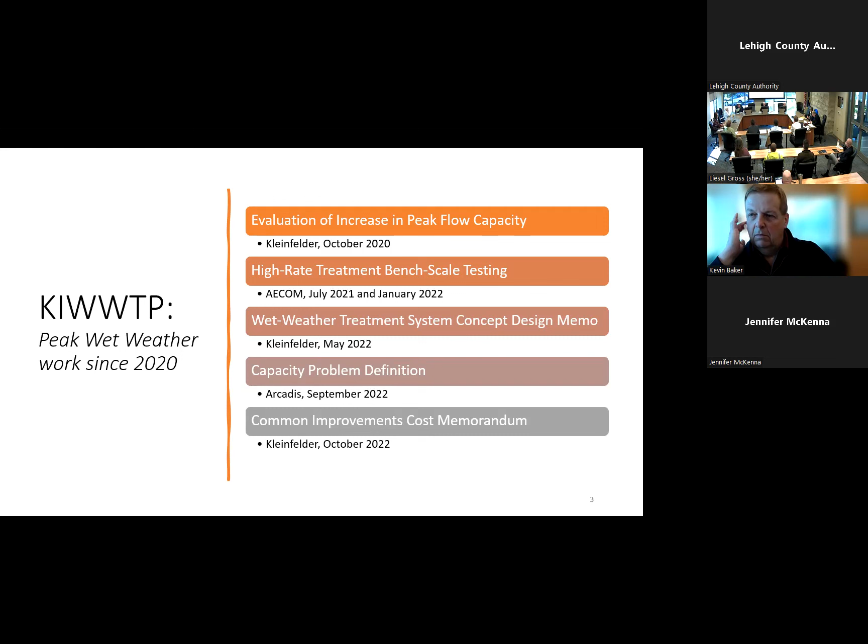003 is used when the plant experiences more than 87 million gallons a day. It doesn't happen a lot, but it happens more than zero times - like Lisa pointed out, that's a good way to say it, it happens more than zero.

So we have to reduce the number of times 003 is used. The tricky part is that the conveyance system is also limited to what can actually get to Kline's Island. We're saying 105 is the number that can actually get there, and everything else backs up upstream. So there's two different numbers in play here, but the biggest number we're going to talk about today is that 87 number and what to do about it.

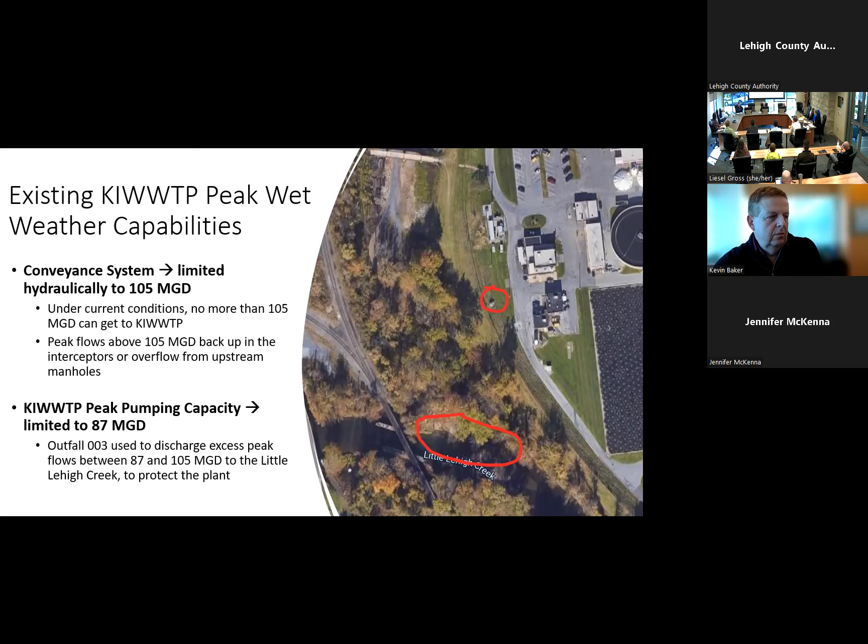Again, DEP does not like 003, and we have to raise the capability of the plant to handle more peak flow.

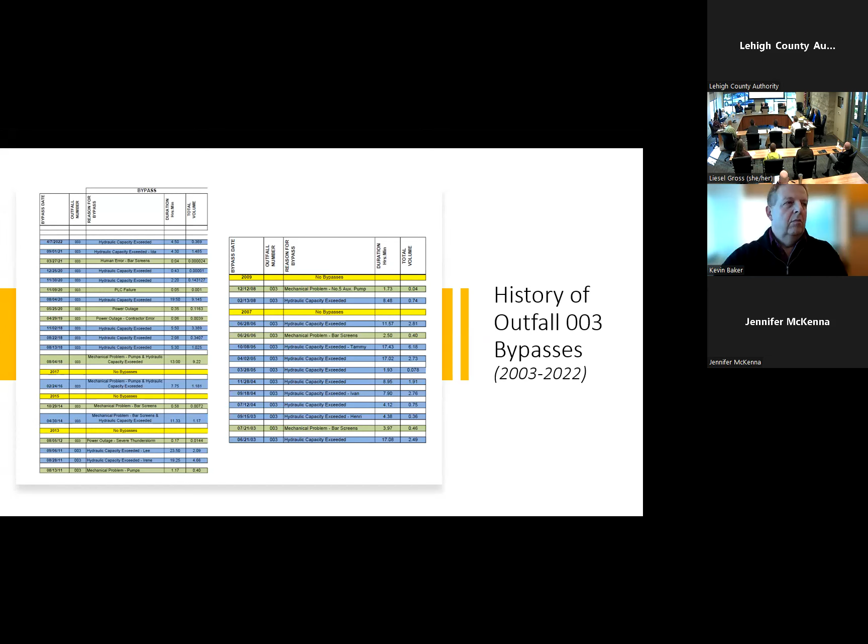So we want to split this up into two phases. The first phase, we want to go from 87 to 100. And then the second phase, we want to go from 100 to 120. I'll talk about the timing and what both those look like shortly. And again, phase 3 is the authorization that we're going to be talking about in a couple minutes.

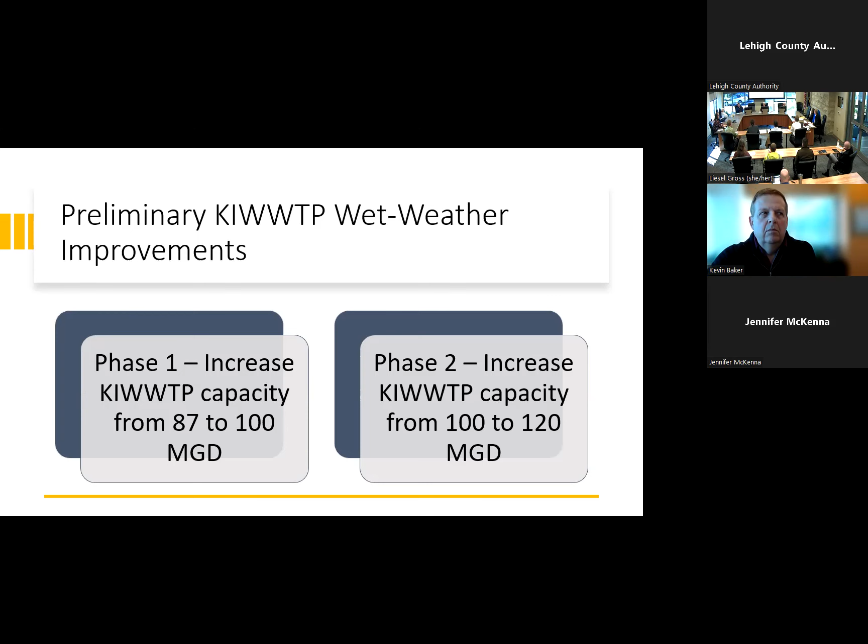Phase 1 is a lot of this is actually master plan driven. So the master plan identified there's two main pump stations at the plant. Both these pump stations need quite a bit of work electrically and from a pumping standpoint. So once we make changes to both of those pump stations, we're going to increase the pumping capacity to 100 at both stations.

And then, of course, there's a lot of electrical involved with that. The third piece to get to 100 - there's some interconnect piping that needs to occur to split the flow. So in a nutshell, it's all increasing the pumping, electrical work, and some yard piping work. And that's phase 1.

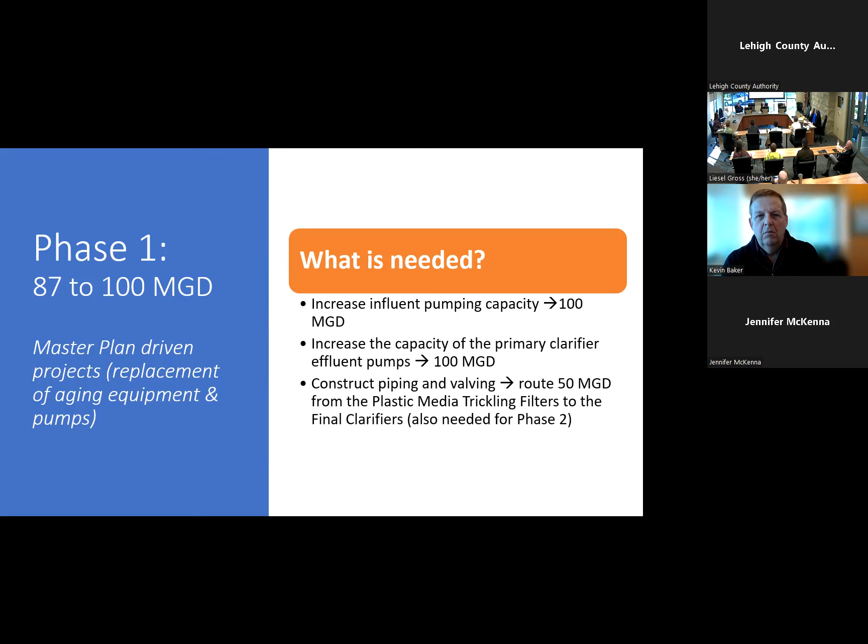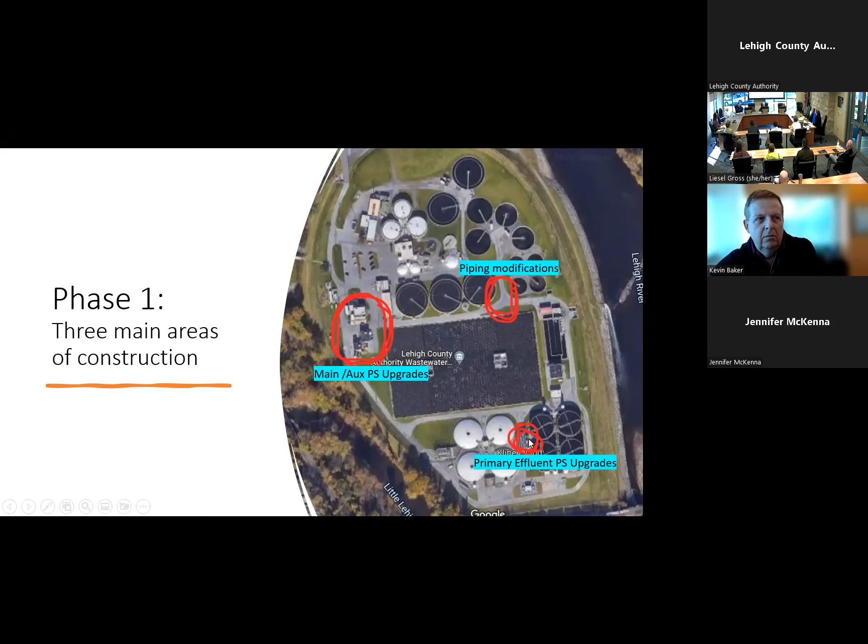This is just a graphical showing where the main areas of the work is going to be occurring. The left circle is the main pump station, auxiliary pump station - that needs upgraded. The bottom circle is the primary effluent pump station that needs upgraded to 100. And then the piping is going to occur in that third circle.

Phase 1 did not talk about anything outside of the plant. Phase 2, we're going to start talking about items outside the plant as well, and again we'll have 100 in place. In order to get to phase 2, remember the conveyance system is restricted, too small. So once we start opening up the conveyance system, that means Kline's Island has got to start handling more peak flow. That's what's going to happen with phase 2.

The Park Pump Station, the LCA Park Pump Station, that force main stops about 1,000 feet short of the plant. So we want to extend that force main to the plant, and then there's additional work on top of that extension to get to 120 - that'll be on the next slide. What's important to know is that this extension has been talked about for decades. It's never come to materialize, but now it's starting to become a solid plan with this phase 2.

We'll talk about the timing soon. What's important to note is that in order to get to 120, we have to do some changing to the way the flow trickles down through the plant. Right now it's always in series, so we have to do some parallel operation to split the flow inside the plant. We'll talk about that soon.

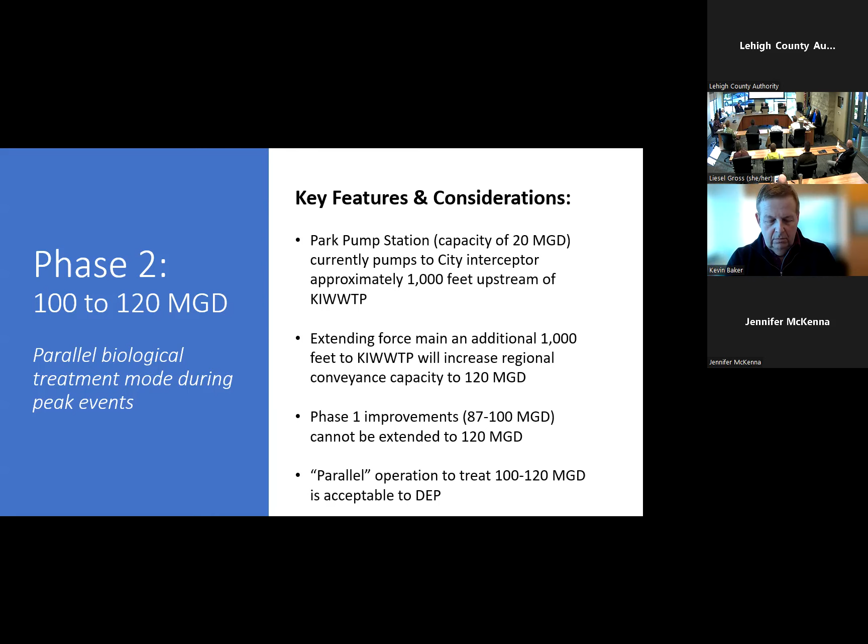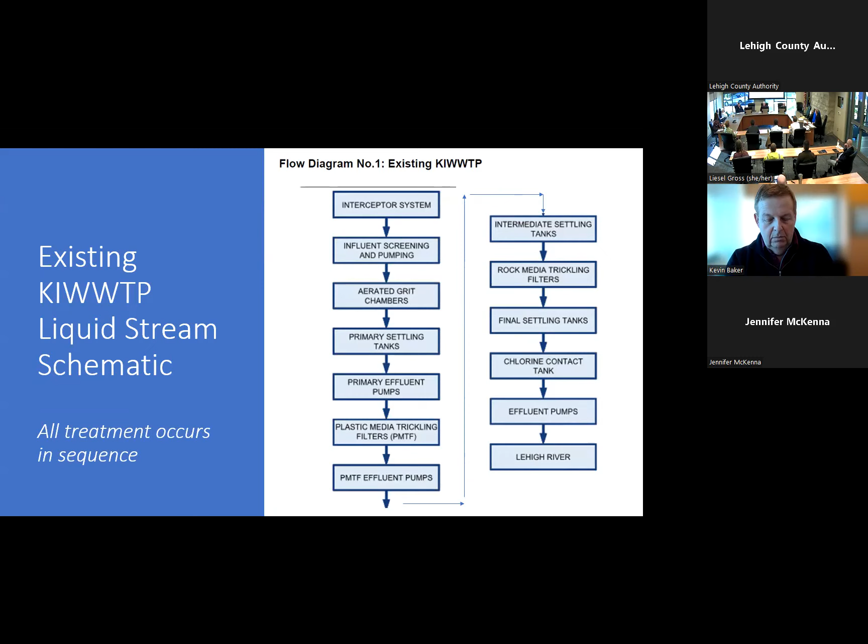So in 120, 20 will be treated by the rocks - this is a very high level view. 20 will be treated by the rocks, 100 will be treated by the 4 trickling filters that we have. Then after that, the flow gets split to the different settling tanks, so that's why we say parallel mode. Only some of the flow is going to be treated by the rocks; the other flow will be treated by the towers.

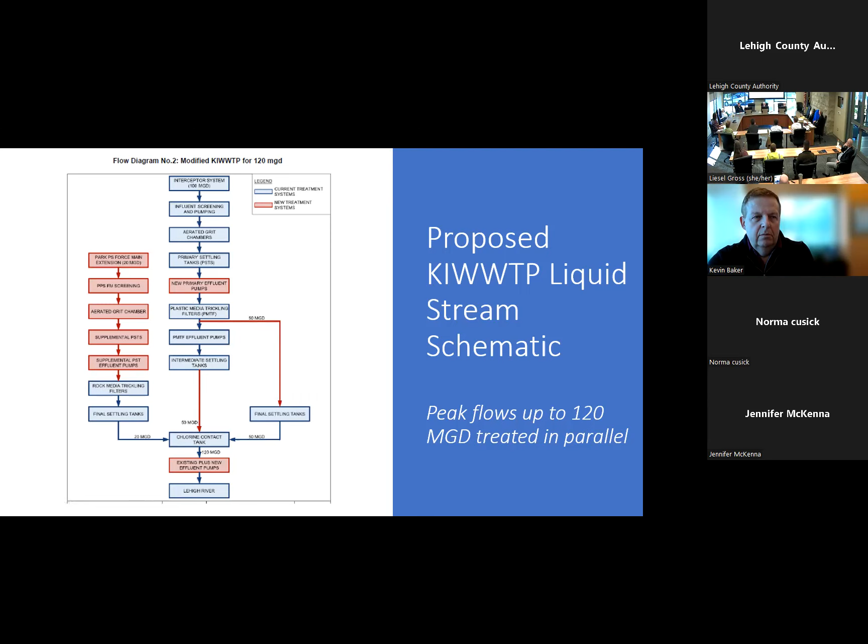So again, this is what I just mentioned already: the extension, new grit chamber, new screen, 2 new primary tanks, and then some valving and piping. And then we have to increase the effluent pumping system to 120 as well.

Again, we'll talk about this shortly, but we've talked to DEP about this 3 times already. We've talked to DRBC about this 1 time, and no major concerns from both parties about getting to 120, which is a good sign.

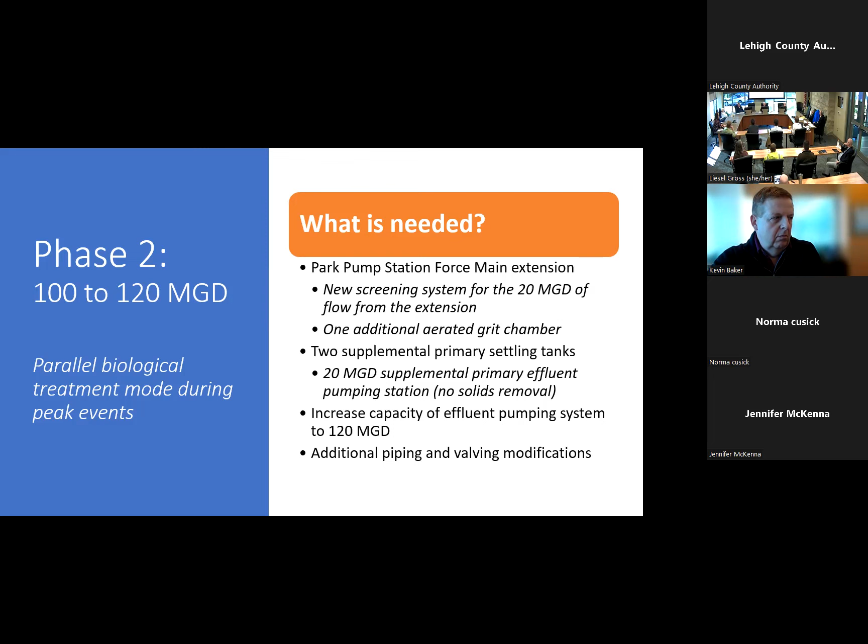Bill, you don't see any risk preventing us for phase 1 and 2 to get us to 120? I mean, this is a theoretical model, right - it's a modeling that we have done. So if you go through key things that have to happen to allow us to get to 120, what are one or two things that keep you up at night that might prevent us from getting to that 120?

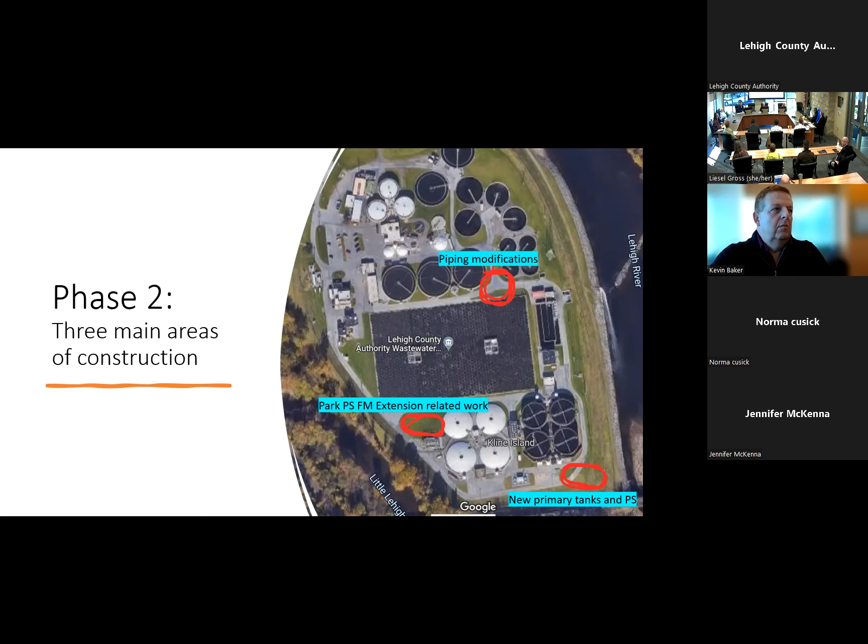So I mentioned that we met with DEP 3 times already. We actually just had a phone call with them about an hour ago, and they are still comfortable with this approach to get to 100. And the one going from 100 to 120 may have to go into the final 537 plan.

So we're talking about the timing soon here. But again, we met them in June, August, November. They're well aware of what we want to do here. No major concerns by DEP.

DRBC, same thing. We have to always make sure we avoid the substantial alteration piece when we talk about Kline's Island. No major concerns by DRBC. They will want a new docket.

So we'll have to take care of the paperwork. And Chuck, I believe you've already started to receive some preliminary design documents from the client for phase one.

Yeah, in a couple months I'll be taking to the board a request for design phase approval for 3, 100 MGD projects. What Phil had said, one of them is the main and auxiliary pump station upgrade. The second one is the intermediate pump station upgrade, what Phil mentioned about the primary effluent pumps that pump the effluent from the primary clarifiers to the top of the plastic media trickling filters.

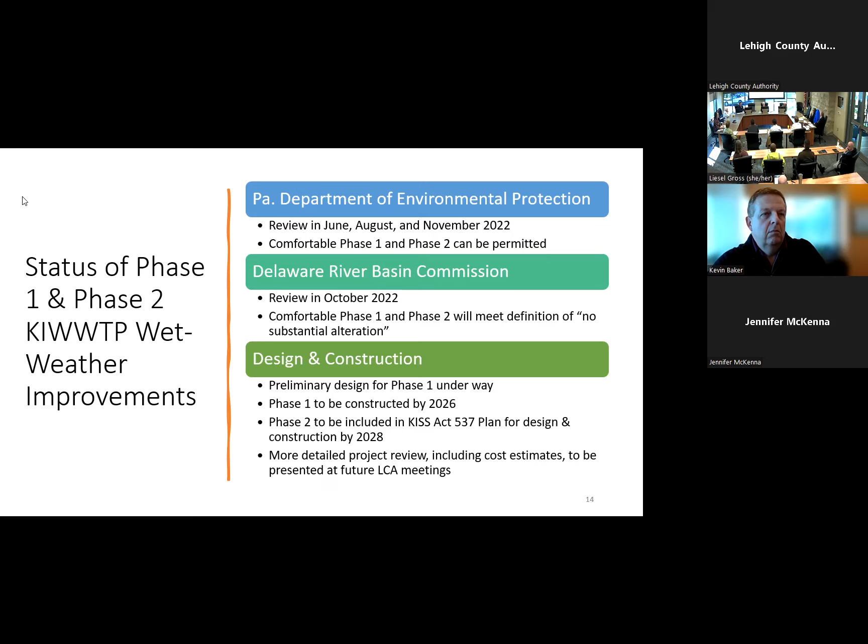So that's a high level overview of phase one, phase two. This may sound like deja vu from a couple years ago when we had the same concept to get to 120. We're going about it a different way now, and the big thing is DEP is on board.

Any questions about phase one, phase two before we get into the trickier phase three? Yeah, what's the major change from the previous plan? The previous plan was the blending concept, which bypassed the rocks, bypassed the filters. So DEP wants to see that treatment occur, which will occur with these proposals.

What about construction and materials and all that kind of stuff? Has that been taken into account on a time frame? Because people are having so much trouble getting that kind of equipment.

Yeah, I know Chuck's gonna talk about the substation in a little bit here. Yeah, all this equipment is like a year out at least. Yeah, I think there's enough time built into your schedule to finish the projects by the end of 2026.

For phase one, if we get design completed next year, we're ready to go out on the street with bidding toward the end of next year or early 2024. That would give us a good 18 months to construct the project. And hopefully—you raise a valid point—because we have that problem with every project now with the delivery of equipment.

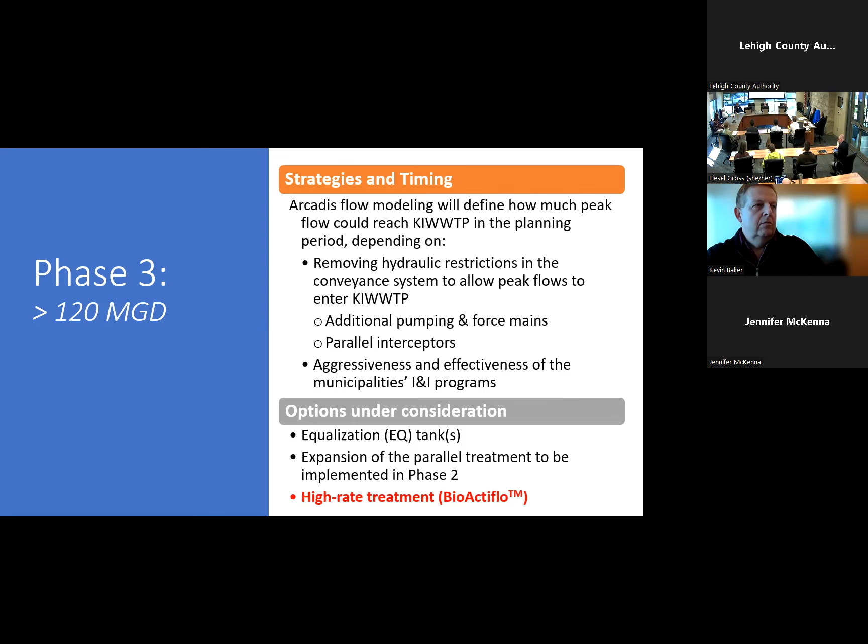This particular one is called BioActiflo. So those are the three main options we're considering above 120. So why the pilot, and why right now? Again, the parallel mode can be stretched, but we don't know how far it can be stretched—that second block there, that middle second block.

There's so many moving parts with the model regarding the final peak flow number, but the best guesstimate is 160 to 180. Again, that's the 2050 flows during a 5-year storm. So you can see that gap.

We may get 150 with a stretch, but then we're stuck with this additional flow above 150. So again, EQ is doable, but I don't know, Chris, EQ just takes up a ton of room, and once you build it, you're stuck with it, aren't you?

Right. And given the nature of the hydrograph that Arcadis is showing, it'll be a wide, long duration peak event. So to store all that flow and then bleed it back into the main plant will really drive the size of that up large. So in these instances, high rate treatment, being able to turn on, manage that high flow for that period, then turn back off, appears to be a better cost-effective fit.

So can't these equalization basins, do they have to be built? Does all of it have to be at Kline's Island? Can't some of these be built on the further outskirts of the city? They could, and that's what we're gonna look at between now and the summer of next year. If for some reason that's a better alternative, then so be it. That's all gonna be looked at with Jim's model.

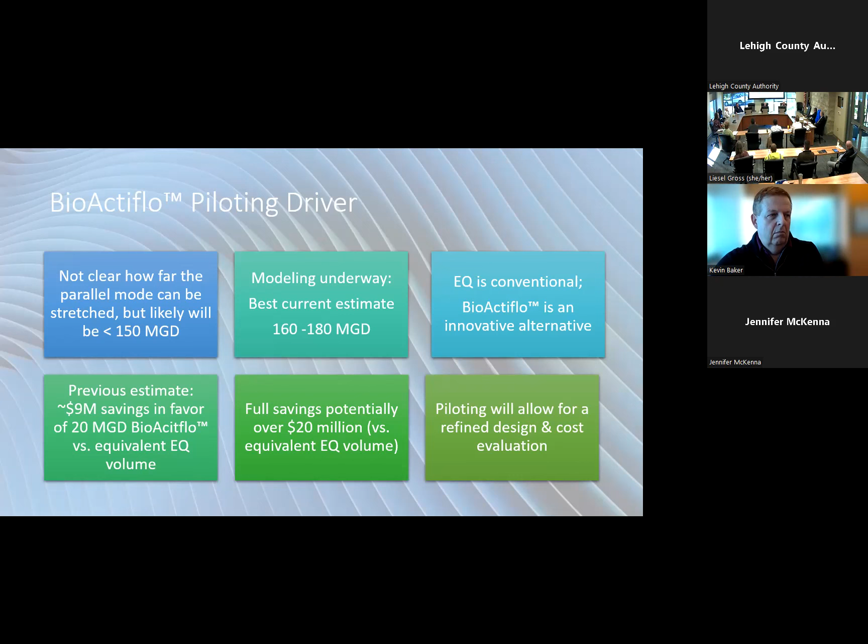And we'll get into some more details on the next slide about what's been done so far. It's important to note that this technology is DEP approved, Pennsylvania DEP approved. What's in Newcastle, out by Pittsburgh Authority, it's under construction right now. The item that's interesting for Kline's Island is that it's never been in operation at a trickling filter plant like Kline's Island. So that's why we want to do the pilot, and that's why DEP also wants to see this pilot.

I'll have Chris touch on briefly about the bench testing that occurred last year to get proof of concept. Yes, we simulated what would be occurring out as a proof of concept in our Conshohocken wastewater lab, and we ran a couple tests ourselves. Veolia did another test where they added the second part of BioActiflo, which includes some chemical addition, flocculation. So they simulated that as well, all to provide the level of confidence that it is viable with trickling filter slough, that type of biofilms.

So again, with the pilot, we want to confirm that it worked at a trickling filter plant. That's the whole purpose of the pilot. Scope of work, we're gonna get into shortly. AECOM is gonna provide the oversight. Veolia will provide the equipment and then an operator. The actual pilot itself is 6 to 8 weeks. We're anticipating April to May of next year, and Chris will have his report by July of next year. And you can see the budget amounts for this authorization.

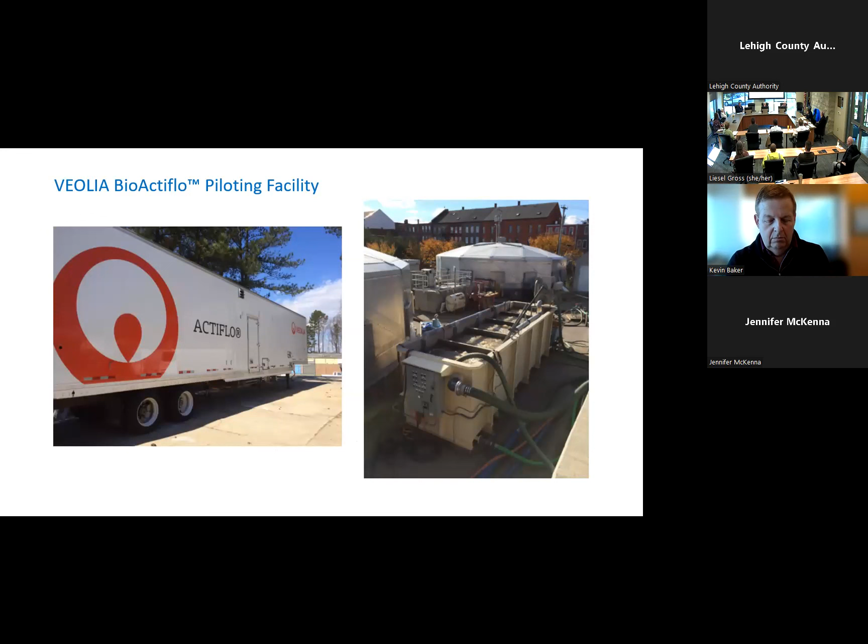Chris, I don't know if you want to talk about this, real fast. Yeah, so the BioActiflo is broken into 2 parts. The first step is that contact tank where the biological activity occurs, the BOD reduction. The subsequent step is where chemicals are added through a coagulation process, flocculation, and then sand is added as a ballast to help for rapid settlement of TSS and BOD that's attached to that TSS. Then the clarified water leaves, and the ballasted sand is collected off the bottom and recirculated through a hydrocyclone, which knocks off the bacteria, reuses that, and then the sand is reused again through the process. It's closed loop for the sand.

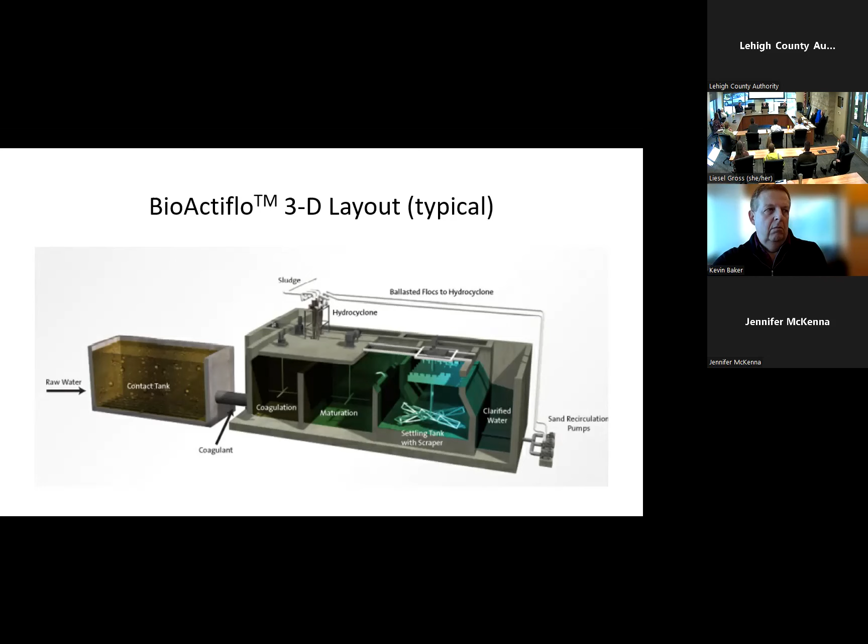So that's a typical layout. So again, why the pilot now if we're talking so far out?

There's a couple of reasons. Our window for this 537 is through 2035. Assuming we get phase 2 done by the end of this decade, that gives us that 5-year window where potentially a conveyance piece will be installed, which is going to force Kline's Island to treat above 120.

So we have the momentum to do the pilot now. We did the bench testing. We can't overlook the fact that Arcadis is looking at the screening of alternatives at the same time right now, so we can incorporate the results of this pilot into that screening. This is not an endorsement of the technology - all we want to know is will it work at Kline's Island. If it will not work, then we're down to 2 options for now.

So we want to keep our options open, and the only way to do that is the pilot. Veolia is on a tight window here - there's a lot of interest in this pilot, and in order to get in the queue for next year, they want a commitment.

Just to backtrack, remind me again, what is our maximum flow capacity at the plant now? How much can flow into that plant? Right now it's roughly 87. I meant the total hydraulic capacity - you can only get 105 with the conveyance system.